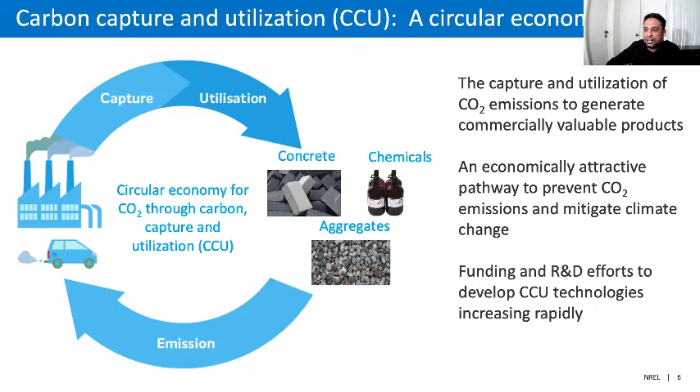This combination of economics and the environment makes it very attractive, not just from a policy perspective, but from a commercial perspective too. There are a couple of firms operating CCU technologies at a commercial scale, though there are a very limited number. But that's a good indicator that industry is interested in CCU as a way of increasing revenue and addressing climate change simultaneously.

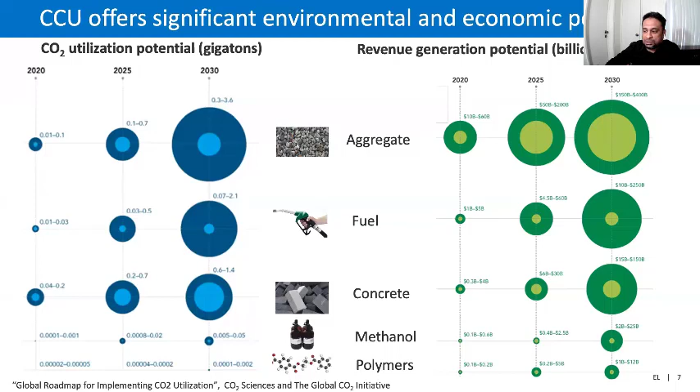Now I'm going to give you a brief overview of what anticipatory LCA is, and how it can address current limitations in existing LCAs of CCU.

If you look at most of these studies, they make an implicit assumption that the utilization of CO2 produces a climate benefit, so CCU technology is good for the environment.

But to look at it more from a robust, systematic life cycle perspective, we need to understand that we are developing a host of technologies. We need abilities to compare different potential emerging pathways to develop CCU technologies and rank them by climate benefits, to understand which pathway is better for implementing a CCU technology.

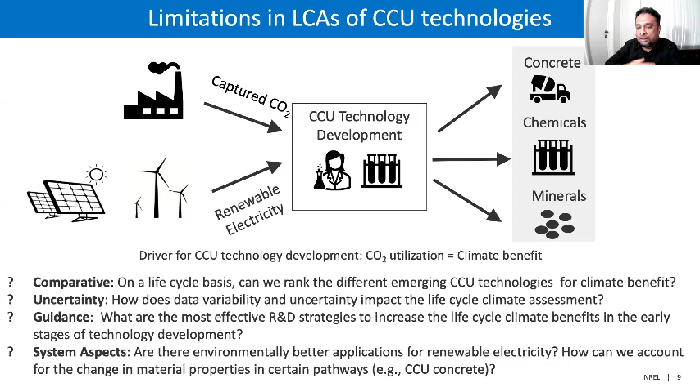When running this assessment, I'm accounting for uncertainty in data, because most of these technologies are in the early stages of technology development. Based on these findings, I can identify hotspots, and LCA can help provide guidance to technology developers.

So this happens in real time. We're not waiting for a CCU technology to be commercialized and then trying to improve its environmental performance. There are a lot of technology lock-ins, commercial lock-ins that happen when technology reaches a commercial stage. So we're trying to address these sustainability challenges in the early stages of technology development.

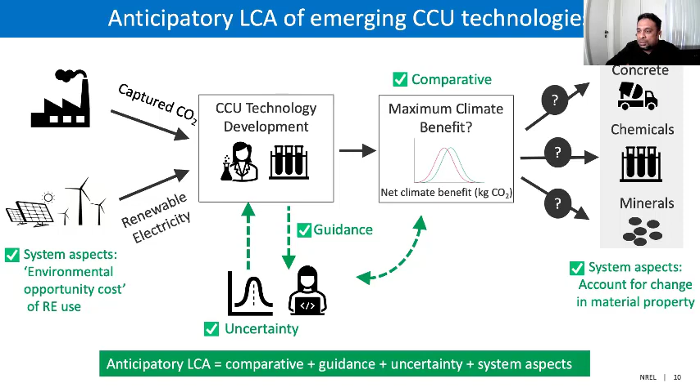I'm also accounting for system aspects like whether renewable energy can be put to better use, for example, on the grid. I call it the environmental opportunity cost of using renewable electricity in CCU technology development. This is a broad framework, depicted visually on the screen, as to how I approach this problem of using anticipatory LCA to evaluate emerging CCU technologies.

So I have CO2 that is being captured in a natural gas power plant, and that CO2 is captured through a post-combustion monoethanolamine system. When we have the captured CO2, we can utilize it in producing either concrete, chemical, or minerals, the three broad categories that I've evaluated in my research.

So the question is, where do we make use of the CO2 to produce the greatest benefits? Is it in concrete, chemicals, or minerals? I'll be evaluating that using a metric called the climate return on investment, or climate ROI metric, which I'm going to discuss later on. As I've indicated, a couple of these pathways require hydrogen to produce chemicals.

So we're going to make use of wind electricity to produce hydrogen through water electrolysis in certain pathways. It's also important to note that when we are running carbon capture in a combined cycle natural gas power plant, there's going to be an energy penalty because a lot of heat is used in capturing and releasing the CO2.

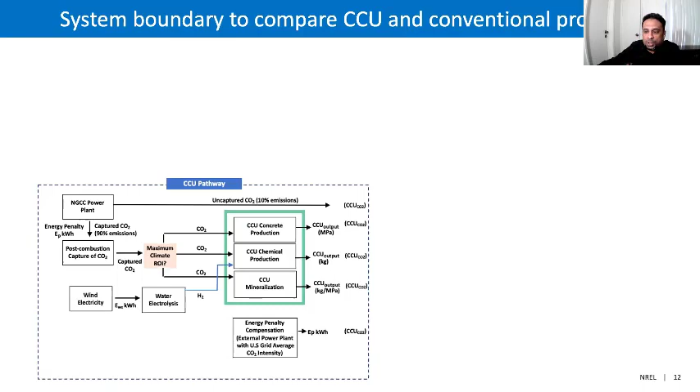So what I'm going to do is, obviously, we need to have a conventional pathway, because if CCU production is not happening, then we have the conventional production of concrete, chemicals, or minerals. So in the conventional pathway, an equivalent pathway is one with no carbon capture in the natural gas power plant.

Wind electricity is going to be supplied to the grid directly, so that represents the environmental opportunity cost because that wind electricity can offset CO2 on the grid. And the three products are going to be produced through conventional means.

In order to gather data to conduct this comparative anticipatory life cycle assessment, I've gathered inventory data from 99 data sets for concrete, 69 data sets from chemical CCU chemicals, and 26 data sets for minerals. This is based on an extensive literature review to gather the data.

I'm going to evaluate 20 CCU products and find out where it is best to use carbon dioxide when comparing this pretty distinct, diverse set of pathways. I'm going to use this climate ROI metric, which I'm going to discuss in future slides. So this is a brief overview of the methods I've used when running this anticipatory LCA.

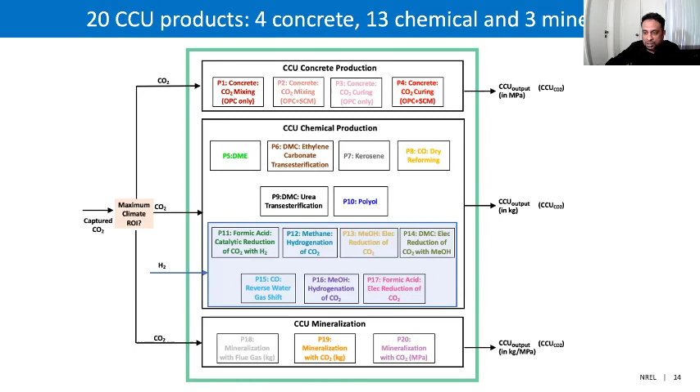As I mentioned before, I'm going to talk about the net climate impact of concrete initially. This is a case study I'm going to use before I go on to the other pathways. So why have I focused on concrete as a part of carbon capture and utilization?

The reason is concrete, as studies show, contributes around 4 to 5% of global CO2 emissions. More importantly, it's one of the hard to decarbonize sectors along with other major sectors like iron and steel. The production of cement, which is part of concrete, is a hard to decarbonize sector. So in this context, if we can make use of CO2 to produce cement itself, that will be beneficial for the environment and also help decarbonize the cement sector. That's the reason I picked this case study.

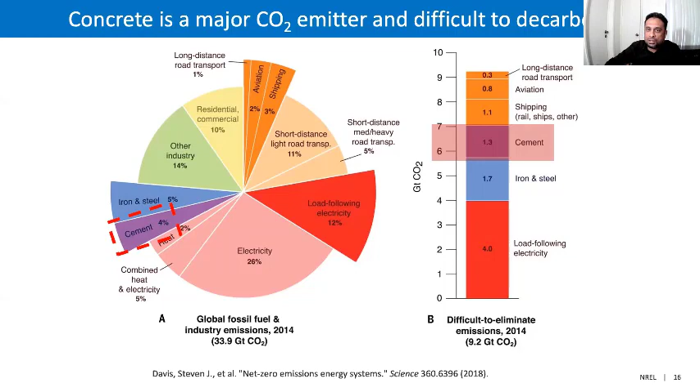The way I'm going to analyze the results, I'll give you an indicative graphic. I'm going to use this net CO2 benefit, which is the difference between the life cycle CO2 emissions from the conventional production of concrete minus the CCU pathway. As I'm accounting for uncertainty, the net CO2 benefit will be plotted as a distribution curve.

If the net CO2 benefit is in the negative X direction, that means CCU concrete production produces a climate burden, because the CO2 footprint of CCU is greater than the conventional production of concrete. If it is in the positive X direction, it's going to produce a climate benefit.

Then you see this percentage value at the bottom of the graph that indicates the likelihood of CCU concrete to produce a climate benefit, because we are accounting for uncertainty in the analysis. Everything is depicted on a stochastic or probabilistic basis. Because this distribution curve lies entirely in the negative X direction, there's a 0% likelihood of CCU concrete producing a climate benefit for this specific data set.

So this is one of the 99 data sets. To make it more visually obvious, if this percentage value is greater than 50, I'm indicating the background in green. If it's less than 50%, the background is in red. So in this case, it is in red because it is 0%. Red is bad for the environment, green is good for the environment — green means there's a higher likelihood of CCU concrete producing a climate benefit.

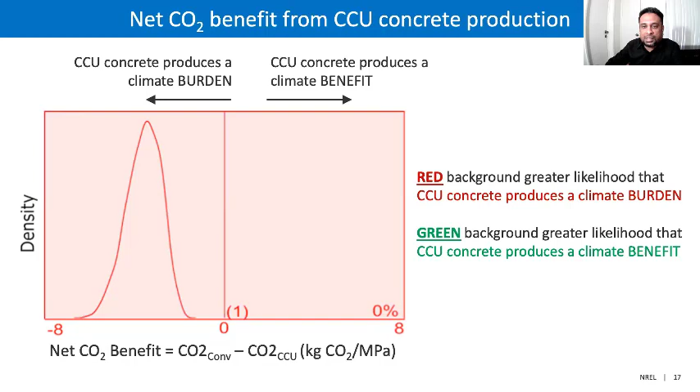I'm going to extend this visual depiction to 99 data sets in my next slide. I won't be getting into the details of the 99 data sets here — there's no time for that.

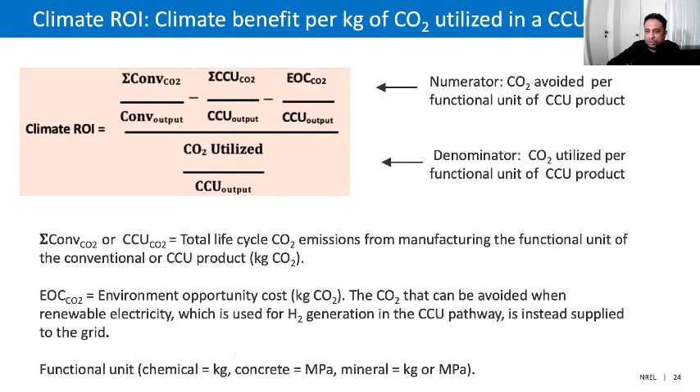As I'll be showing you in the results, I'm going to determine climate ROI on a stochastic basis, so there's going to be a distribution. And the implicit assumption here is that the production of a CCU product is going to offset a conventional product which is produced in the conventional route. So this is the brief overview of the climate ROI metric. It's a unitless metric, to re-emphasize, and we want it to be as positive as possible. So with that, I'd like to move on to the next couple of slides where I'm going to show you the results.

So this is again an illustrative case study. It will help you interpret the results in the future slides easily. As I told you, the climate ROI is unitless, and it can be either greater than zero when it's producing a climate benefit, or less than zero when it's producing a climate burden. Here I've shown you two specific pathways. I told you I'm discussing 20 pathways. So I picked out two pathways, P2, which is concrete production using CO2 mixing, and P11, which is the production of formic acid from captured carbon dioxide.

So there are two key numbers here. For P2, it is 70%. What this means is that out of 2000 runs, this distribution, we get from 2000 Monte Carlo runs, which determine the climate ROI of concrete when CO2 is used in the mixing of concrete. In 70% of those 2000 runs, climate ROI tended to be greater than zero, so it's producing a climate benefit. The corresponding value for formic acid is 96%. So in 96% of the 2000 runs, formic acid tended to have a positive climate ROI or produce a climate benefit.

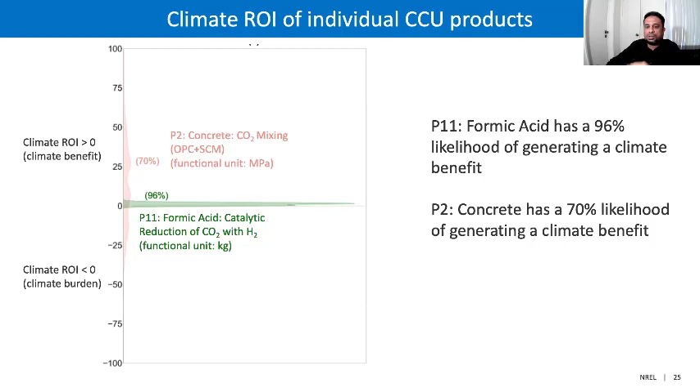So you have to understand that I've run this for each individual pathway. So this is an absolute assessment, I'm not running a comparison. I'm running an absolute assessment, evaluating the climate ROI for each of the individual 20 pathways. So I'm extending this analysis for the 20 pathways that I've shown you here on this graph.

This graph is a very busy graph with a lot of distribution curves with uncertainty depicted. So the point of the graph is to show that when we're evaluating the climate benefits of diverse CCU pathways, which are in the early stages of TRL, there's a significant degree of uncertainty. We don't need to go through each of these curves, but as you've seen, there's a significant spread in the values, and there are certain values which are really negative in terms of climate ROI, which is not good for the environment. There are certain pathways with a high level of positive climate ROI, which is good for the environment.

So I've used 20 pathways. For certain pathways, I've calculated the values with and without the environmental opportunity cost. For example, in this P17 pathway, if you don't consider the environmental opportunity cost of renewable energy use, then formic acid has a 31% likelihood of producing a climate benefit based on the climate ROI values. If we account for the environmental opportunity cost, then formic acid has an 8% likelihood. So accounting for the environmental opportunity cost is important because it gives you a true picture that the renewable electricity can be put to better use on the grid.

So the key findings from this graph: there are 4 pathways, P8, carbon monoxide; P11, formic acid; P1 and P2, where we produce concrete through CO2 mixing.

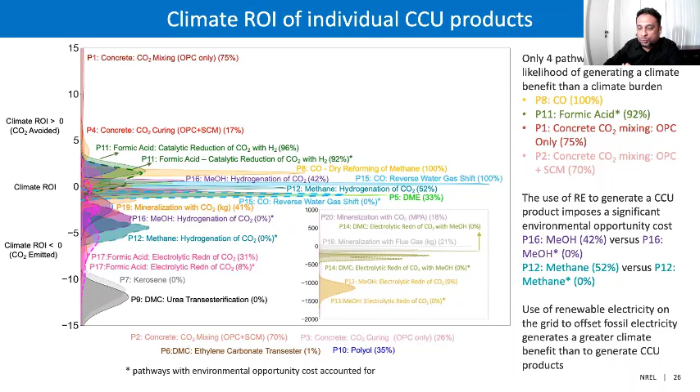With that, I'd like to shift the mode of assessment from an absolute mode to a comparative mode. What I showed you previously was an absolute mode, where I quantified the likelihood of P2 and P11 pathways producing a climate benefit across 2000 Monte Carlo runs.

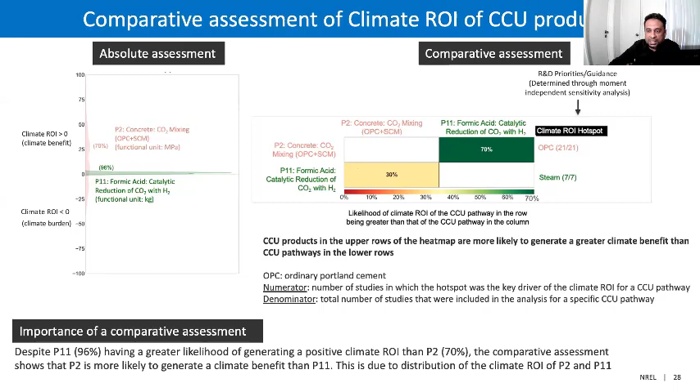Energy use is the key hotspot for the chemical pathways, while the consumption of cement and the usage of electricity in the CO2 curing process are the hotspots in the cement pathways. So this is a brief overview of the comparative assessment - basically these four pathways are probably the best pathways to utilize CO2 in.

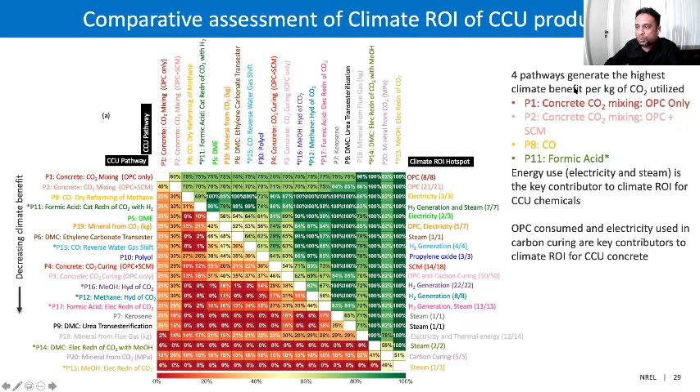Now I'm just going to give you a couple of brief scenario analyses. The first one investigates what happens when the environmental opportunity cost of renewable electricity is zero, because we know that grids are tending to become greener and greener.

So renewable electricity on a green grid, we'd rather use it in carbon capture and utilization, because on the grid there's not much potential to offset CO2 when the grid becomes really green. So that's one scenario in which the environmental opportunity cost of using renewable electricity is zero when the grid itself is green. The second scenario is using renewable electricity from captive plants, where the purpose of the power plant is only to power the CCU operations, so there's no possibility of supplying that electricity to the grid. Therefore the opportunity cost is zero.

Or the use of curtailed electricity. Curtailed electricity is basically electricity not supplied into the grid because it exceeds the grid's capacity to transport or transmit renewable electricity. In that case, you'd rather use that curtailed renewable electricity in CCU products. So in this scenario, what happens when the environmental opportunity cost is zero? The results are still the same. It still holds that these four pathways tend to produce the greatest climate benefit per kg of CO2 utilized. So that was the key finding. If you remove the environmental opportunity cost, the results still hold. These are the four most preferable pathways.

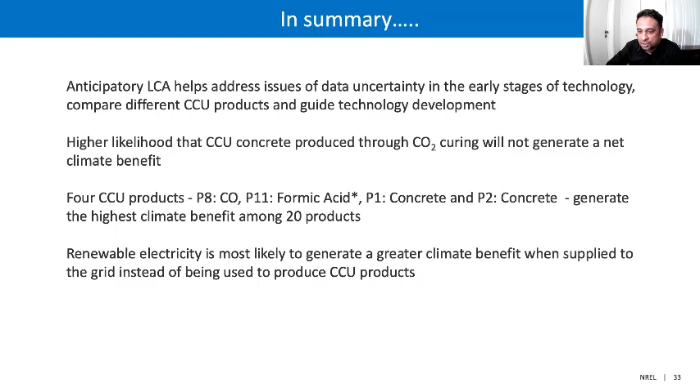So with that, I'd like to summarize all that I've discussed with you today. Anticipatory LCA helps to address or identify issues of data uncertainty and account for them when conducting the LCA. It helps you compare different CCU products and guide technology development by identifying hotspots in the early stages of technology development. As I told you, there's a higher likelihood that concrete produced through CO2 curing will not generate a climate benefit - again, this is based on the current assessment. Obviously technology can improve, and we've provided ways in which it can be improved significantly. There are four CCU pathways - production of carbon monoxide, formic acid, concrete through CO2 mixing - that tend to generate the highest climate benefit among the 20 products analyzed. And for now, based on the current grid CO2 intensity, it's better to use renewable electricity on the grid rather than for the production of CCU products.

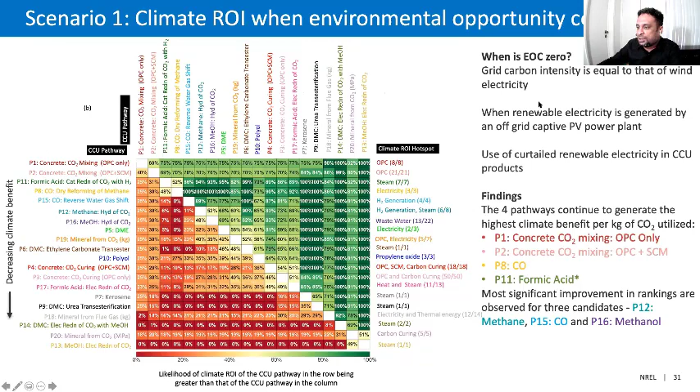Are you referring to the scenario analysis? If you're referring to the scenario analysis, the first one is we assume that the opportunity cost becomes zero because of three specific assumptions, and we run the analysis. The second one is we make an ideal assumption that waste heat is used in the production of CCU chemicals. We are not assigning a probability for each of these scenarios. These are just more of an exploratory analysis in terms of the scenarios that were set up. So we haven't assumed the probability of the scenario actually happening; it's more of an exploratory analysis.

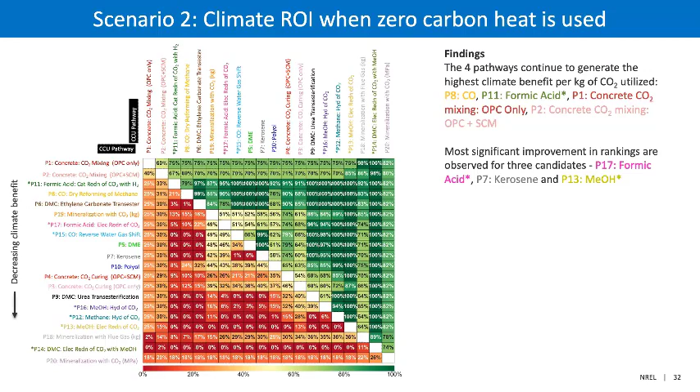Someone says, you used already existing data sets in the analysis, yet if you were analyzing a process with no data sets or some key data sets were missing, how would this person proceed?

Yes, so that was, in fact, when we were shortlisting the data to be included or excluded from the analysis, if the inventory data was not presented, unfortunately we need a starting point. If the inventory data was not used or presented in the study in a transparent manner, we couldn't include it in the analysis. Obviously with zero data it's not possible to run the LCA, so we used the best assumptions possible with inventory data from openly available studies when conducting this analysis. In case the data is not publicly available and we want to run this analysis, we can work with the technology developers in a more confidential partnership kind of way rather than obtaining data sets from open studies.

Thank you for this amazing talk. I've got a lot of questions I'd like to discuss with you in detail, but let's start with your assumptions.

What parameters and their ranges varied in your Monte Carlo analysis? One is definitely, when determining the life cycle CO2 footprint of the material and energy inventory items, that was obtained from the Ecoinvent data set through SimaPro. Then we also accounted for the variability in material properties. For example, if you're going to use CCU concrete, the strength varied from 20 to 25 megapascals per meter cube of concrete. The material properties variance was accounted for, as well as the variance in the CO2 footprint of the material and energy inventory items. So those are the two main contributors which led to the uncertainty and the spread in the Monte Carlo results—the variance in material properties and the variance in CO2 footprint associated with the inventory items consumed in the production of CCU products.

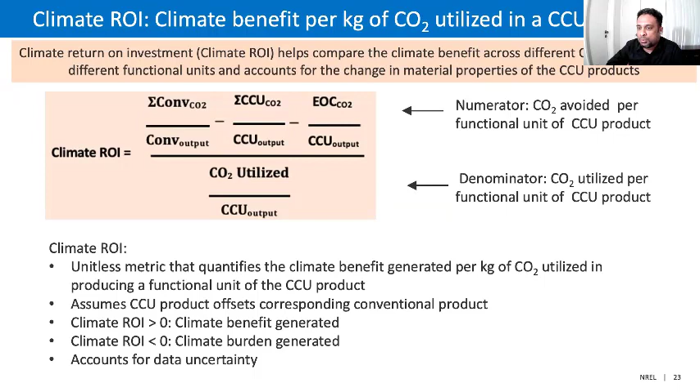Is the uncertainty determined from the analysis of the data sets or does it come from other sources? From the data sets, as I told you—the inventory items and the material properties were obtained from the data sets, which form the basis of the analysis.

Do you think compressive strength is the right metric for comparing concrete mixtures' environmental impacts? I won't say it's the only metric—it's one of the key material properties, but there are others like durability that haven't been studied as extensively. Compressive strength happens to be the industry standard and most commonly used. In fact, I'd say most studies use a mass-based metric for concrete, which is not as useful as an actual material property metric. Besides compressive strength, other material properties like durability can be investigated in the future. Unfortunately, we don't have enough durability data in the 99 data sets to run a comprehensive analysis, so I'd say we need to repeat this analysis for other material properties like durability.